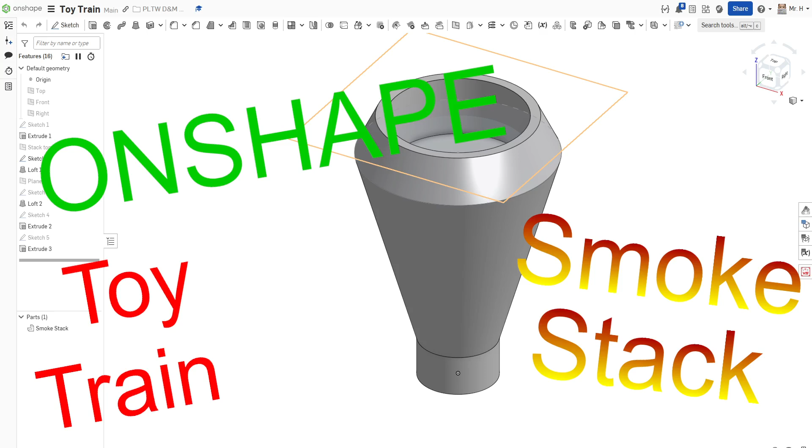As you see, it is not that difficult a project. It's a quick couple of steps that'll make you create this beautiful little piece right here. So let's go ahead and create a new part studio, and I'm going to go ahead and rename that to the smokestack for ease of use later. So, the smokestack, there you go, two words, boom, done. Let's get into this.

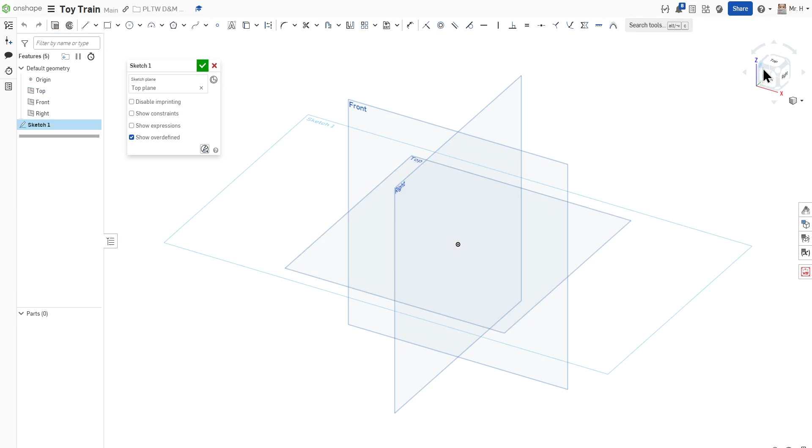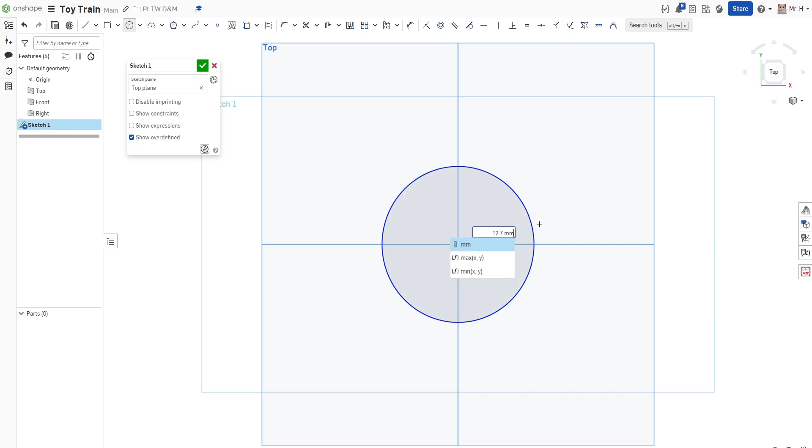I am going to start off first on the top plane, and I'm going to make a new sketch here. I'll click on the top, so I have this nice plane right here. I'm using the origins to create my X and Y axis to make it easy for me. We're going to take the circle command, and I'll use the C shortcut to the circle command. Right from the origin, we're going to pull this out, and we're going to make this 12.7 millimeters.

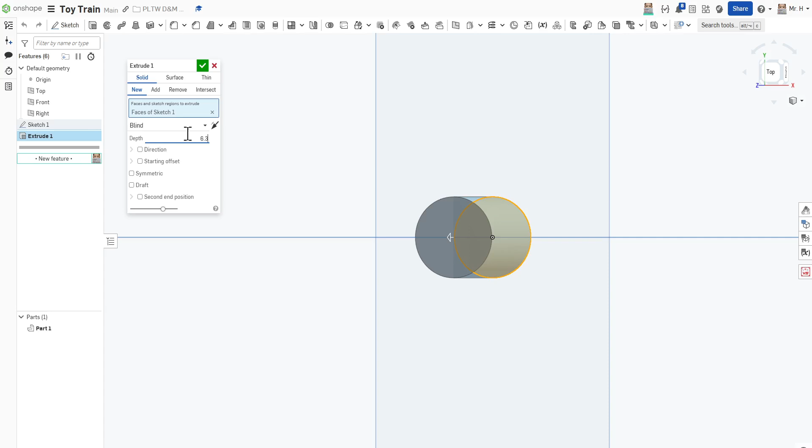Now, at 12.7 millimeters, what we're going to do next is simply extrude this and create a new shape. So now we're going to go ahead and extrude this, and we're going to extrude it to 6.35 millimeters and just leave that as that. So that's what you have so far.

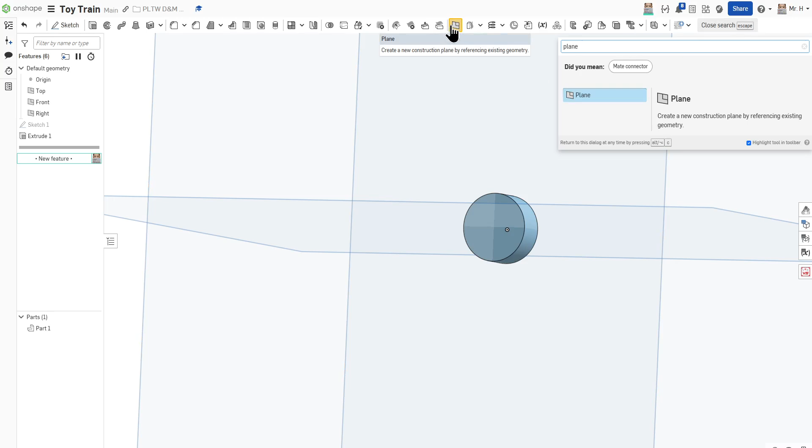Now we're going to go ahead and create a new plane. For that, we're going to come right up here to the plane tool. In case you can't find it, go to search, find plane right there, click on here. Click on the plane tool, and I'm going to click on the top of this and create an offset plane. There we go. We're going to set this to exactly 31.75 millimeters. Nice little distance right there. We're going to check it off here.

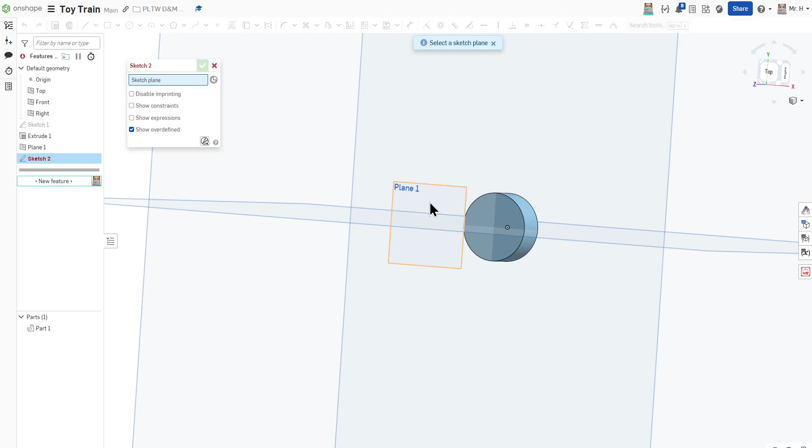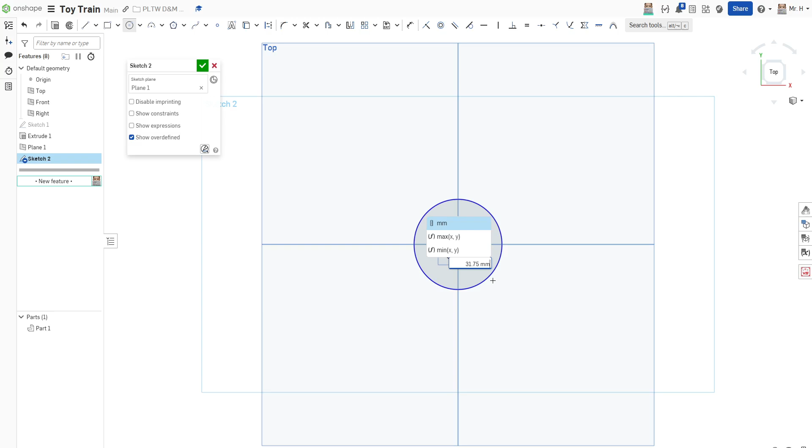Next, we're going to put a circle right here. Again, we're going to do another sketch right here, on this plane. Center that up, and I'm going to go back to my circle tool or click the C command. Click on here, and I am going to pull this out and create a new circle here. Now this circle is going to be 31.75 millimeters. So now that we have that, we're going to finish that little sketch off.

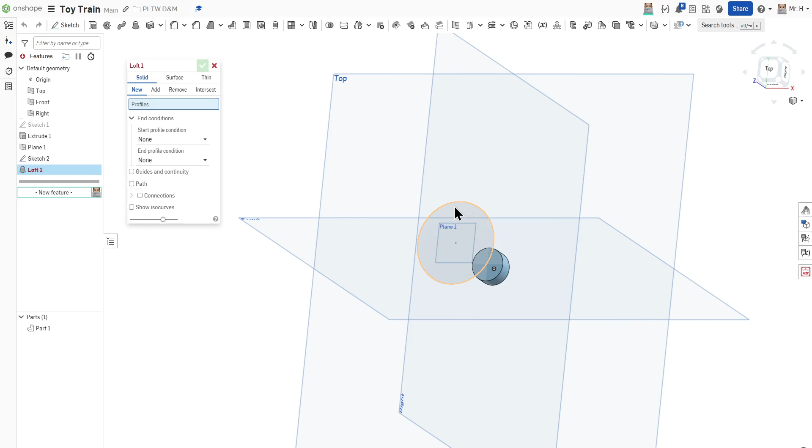Now we're going to go to our loft tool, right here. Let me make it easier for you to see. There you go, loft tool, right there. People have trouble with loft, so what you're going to do is simple. Just click on the circle, see how it lights up the top. And then on the shape below, you just want to touch the very top and make sure it's highlighted. Once it's lit up, click on that and done. So we now have this. I'm going to finish that loft, and we're going to go on to the next one.

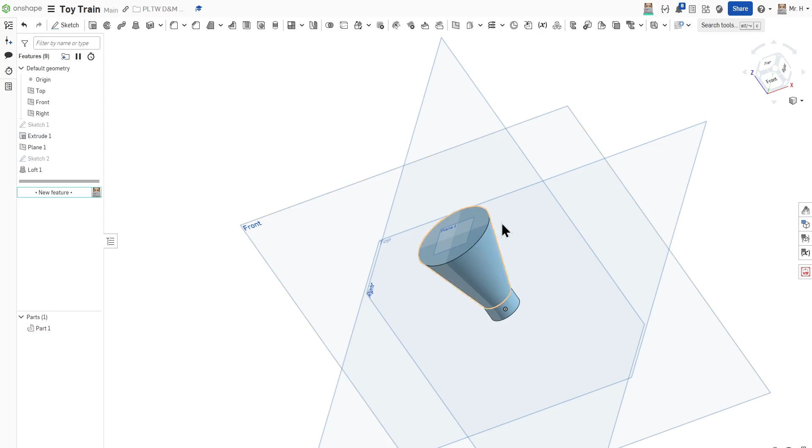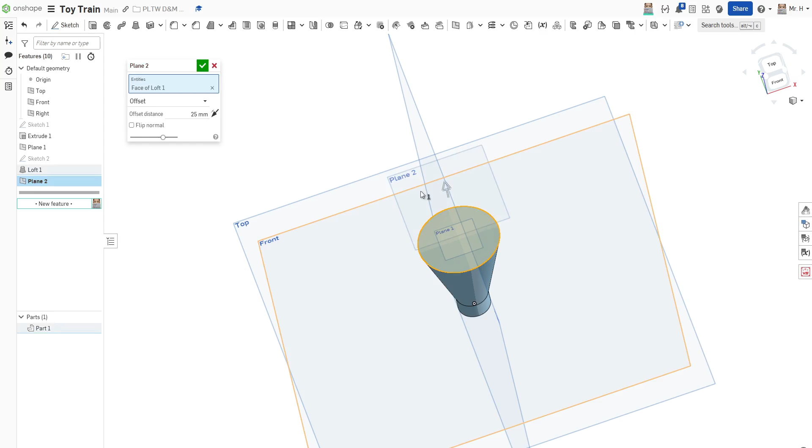So now that we have the shape of the funnel, we're going to go ahead and create another shape on here. Now I'm going to do another offset plane on here, and this is going to be 6.35 millimeters. Okay, so now it didn't create the plane. Sometimes that happens, so let's try it again. There you go.

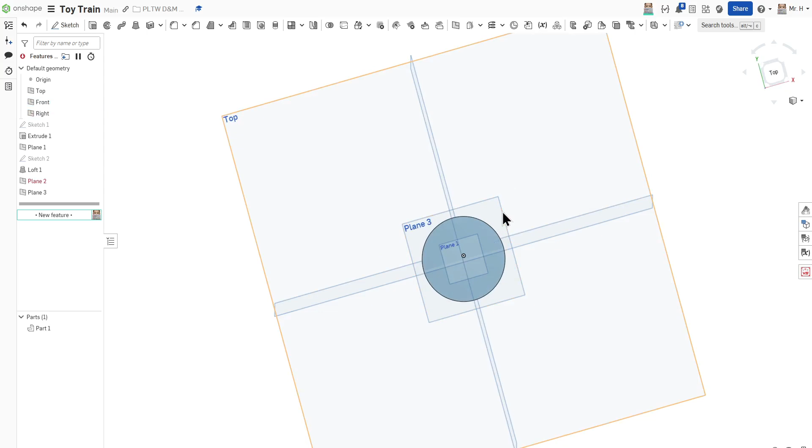6.35 millimeters, there you go. So now we have that there. And on this plane, plane 3, we're going to create a new sketch. I'm going to go back to my circle again, right from the origin. And this one is going to be 25.4 millimeters.

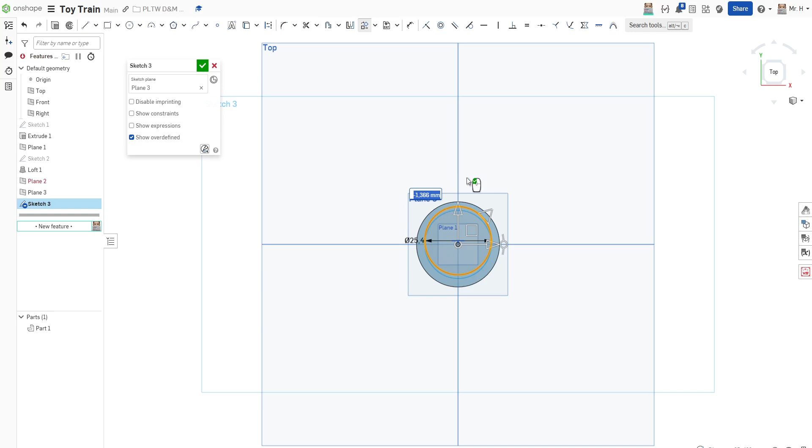Now, it's not on the origin, but we can fix that. How do I do that? We can come in here and find our move tool, this transform tool. And if I click on here and simply drag it down, click once, and there we go. So that was my mistake, I didn't hit it. But in case you don't have it directly on the origin like I did, go to the transform tool directly at the bottom of linear pattern.

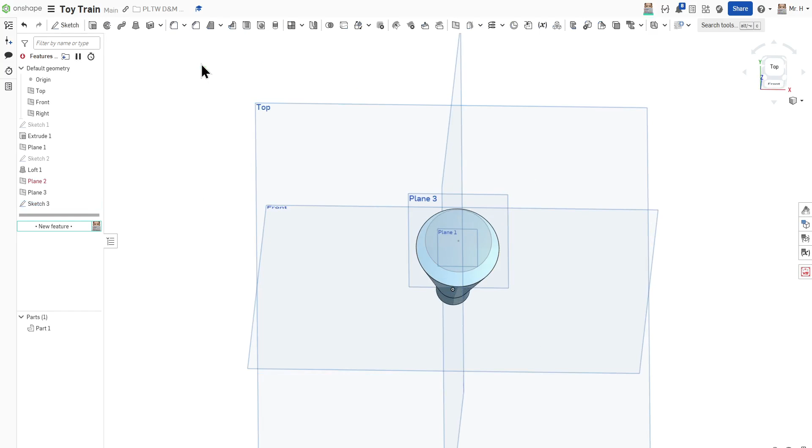All right, so now what we have here is we're going to do one more loft command. I'm going to click on the green check mark, come back to loft, and do the same thing I did before. Click and click, and there we have that little shape right there. Check it off, bing, bang, boom. We got another one done.

All right, so now that we have that, let me go ahead and turn off my front and my right planes. Okay, so now that we have this right here, we're going to put a new plane sketch right here.

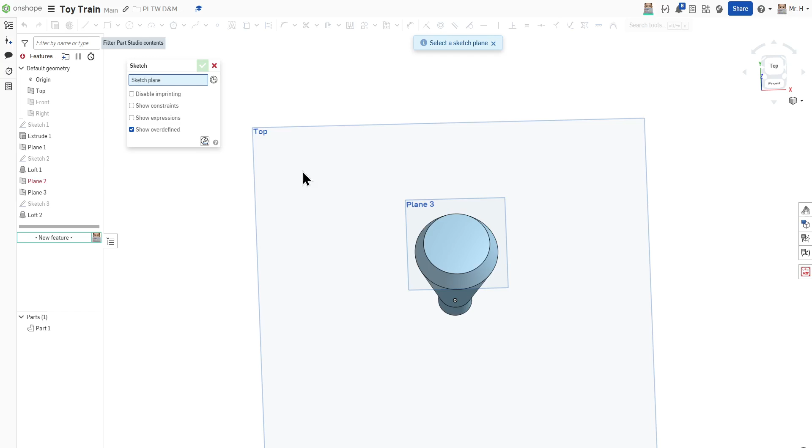And I'm going to put another circle here. Wow, this is really hard, huh? And we're going to do this at 22.225 millimeters, like that. And that's it.

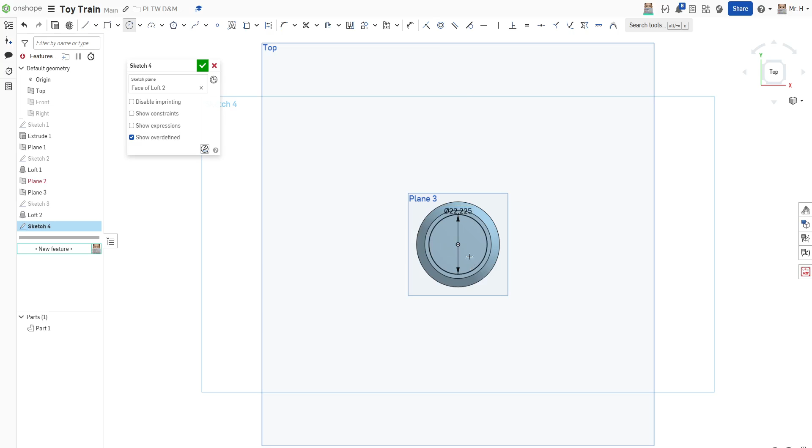Now we're going to come here to extrude, right here, extrude. And on the extrude, I'm going to click on this interior circle. I'm going to click on remove. And make sure you set this to 9.525 millimeters. And that puts you there. So we're going to finish that extrusion.

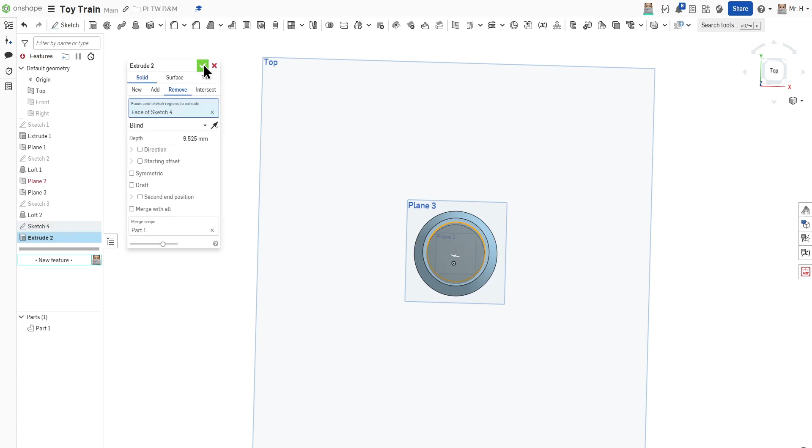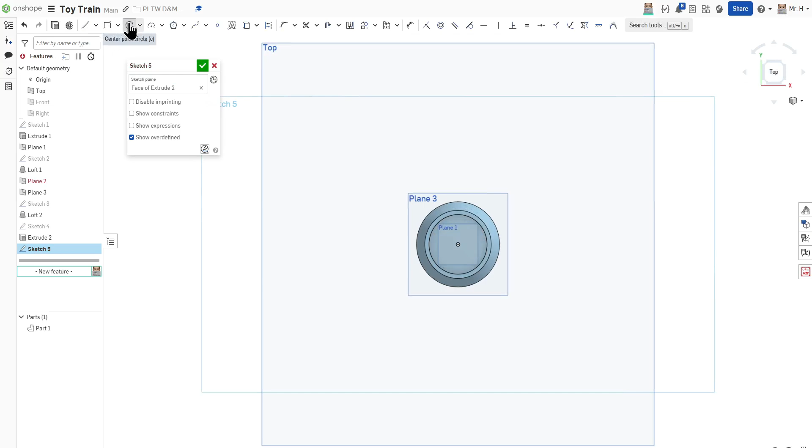And then do one more circle. We're going to take a sketch. I'm going to sketch on this interior circle down here, the interior part of this cutout we just did with the remove tool. Click on there. And now I want to put one more circle in here. And we're going to make this 38 millimeters.

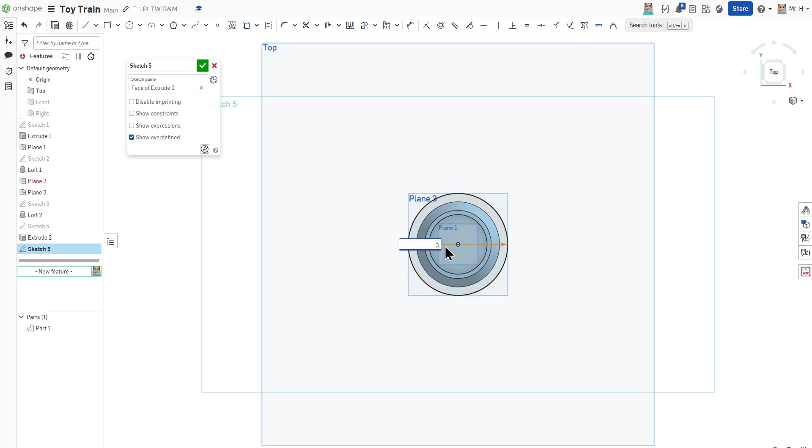Now, isn't that a bit big? Yeah, it is. But remember, when we make mistakes, we can easily fix this. If I can click on that measurement, let's try 3.8 millimeters, see how that works. Now that's kind of small too, huh? So what would be good for the pass-through for the smokestack? The answer is going to be 9.525 millimeters. Don't be afraid to make mistakes.

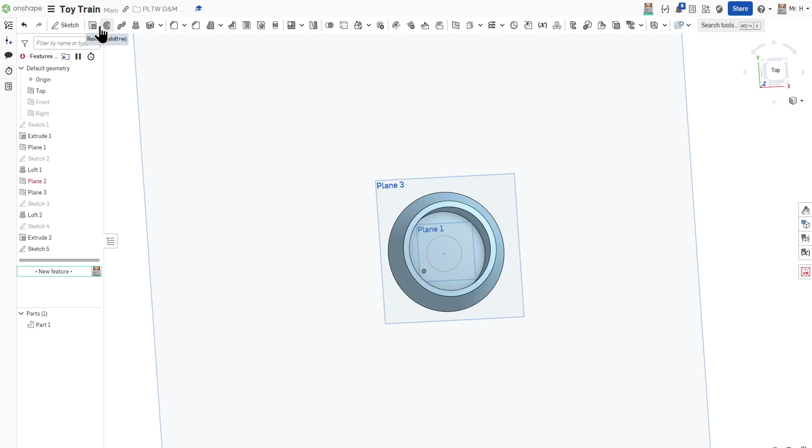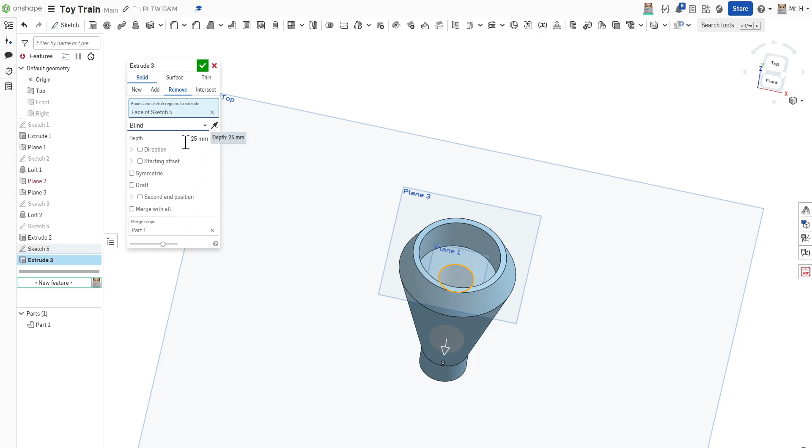This is a digital environment, so you can always go back and correct it, and everything will work exactly the way you need it to as it goes. So now I'm going to finish this sketch. I'm going to go back to extrude one last time. Click on this, I'm going to remove, and I want to go all through. So change blind to all through, and we have this done. Now, if you want to, you could also set this here to blind and change it to 38, and that would just pull it straight out. But again, the easiest way to do it would be just to change it to all through.

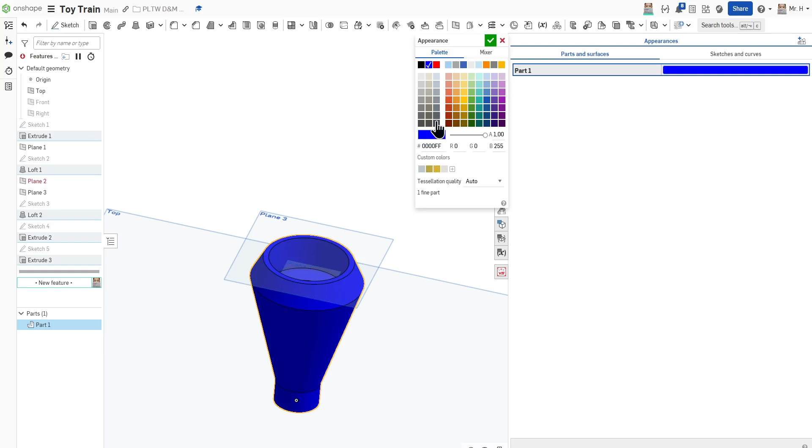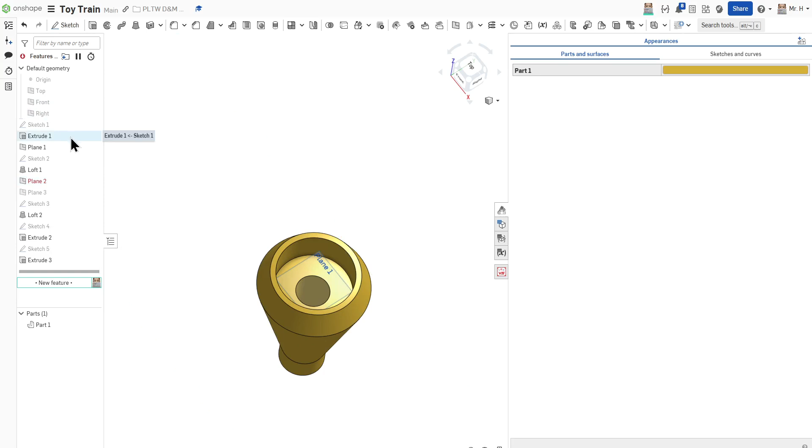And you are done with your smokestack. I would go back in here and just change your color too, and maybe give it something interesting. Blue, or maybe this goldish color right there for me. I like that, bronze. And I will turn off my origin and my top plane, and also hide this plane. Again, my second plane I screwed up, so it comes up red, but it's not going to affect my design here at all. So I can probably just suppress this and won't have to worry about it. But that's it, so that is your things here, and that is your train stack.